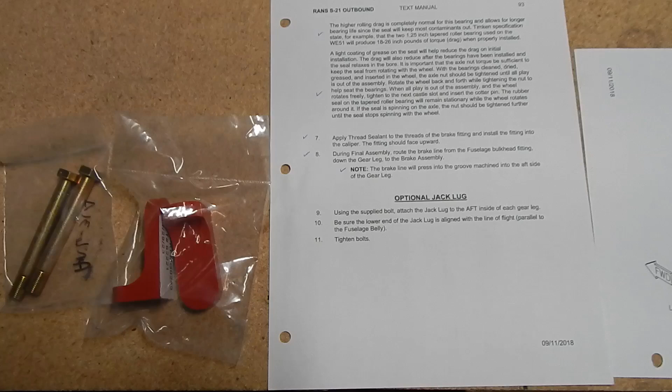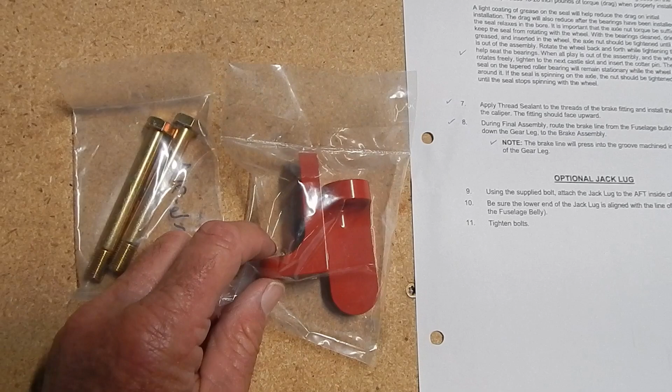I'm going to take a break from the motor for a little bit. I purchased the optional jack lug set, and these are just some lugs that go onto the axle or below the axle of the wheel. If you need to jack your plane up, it gives you a firm place to place the jack.

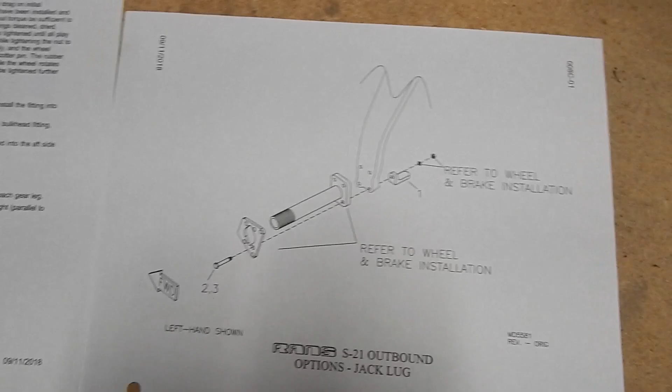You can kind of see the design here, that it just goes behind the gear leg and gives you a place for a jack. I've often thought about if I have to change a tire in the rough or outdoors, how am I going to do it? There really was nothing, no place to put a jack before. Even now, as I'm putting this on, I'm figuring, how do I jack up a side of my plane?

So I came up with a process here. I'm going to get the plane jacked up using this contraption, and then I'll get my lug on down here. Well, the jack lugs are on.

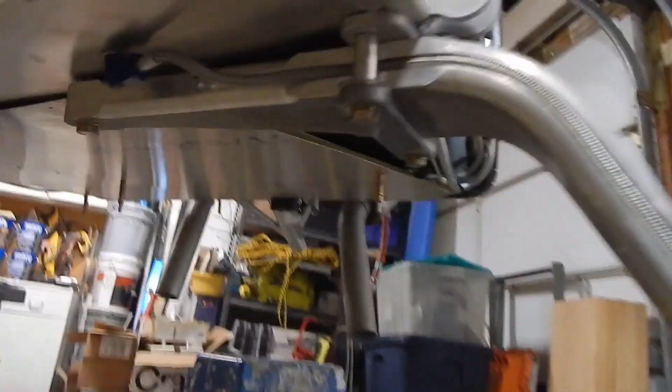They're a great addition, and if you are a new builder or haven't gotten to this point, I would definitely order them. Trying to jack the plane up without those is really hard. There's no place to put a jack under there. The only option really was underneath this, but you'll have a fairing over that later. And then you've got quite a distance to the ground to get your jack up, so you've got to have something, a wood brace or some type of step, to get your jack up that high. So I would recommend these if you haven't bought them already.

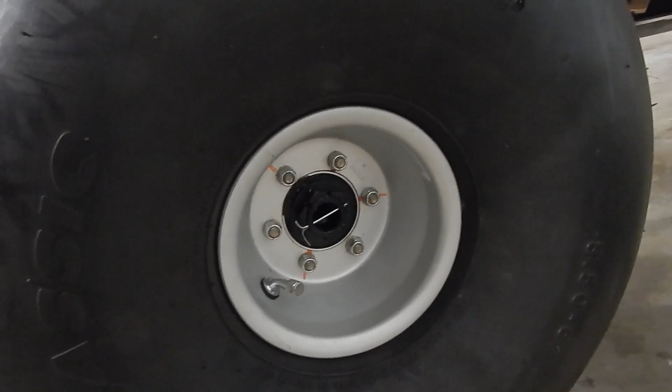It was a little bit more difficult than I had planned. I had forgotten when I put these wheels on that there's only 3 of the nuts that come off that bring the tire off. The other 3 actually hold your wheels together, the 2 halves of the wheel. So I've put a little orange mark there to remind myself that you only need to take those 3 off and the wheel comes off. The other 3, if you loosen them up, you've got to get a wrench behind them or an Allen wrench to tighten them back up. You don't want your rims to split because those are holding your seam together and everything else. If you split that rim, you're all over resetting your tire again.

It also involved splitting the brake calipers in order to get the wheel off and everything. It was just more than I had bargained for. I thought it was just going to be replace a bolt. But they're on, and I'm glad they're on, and we'll move on.

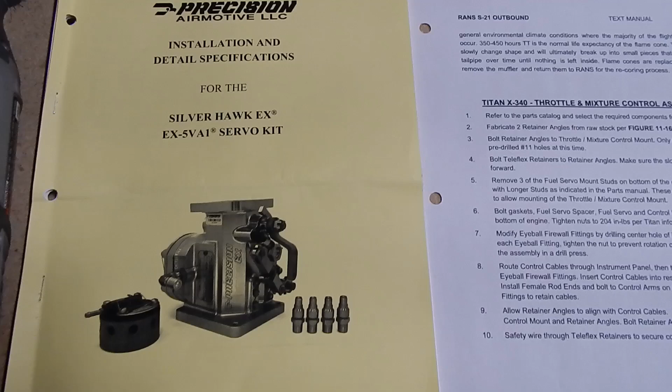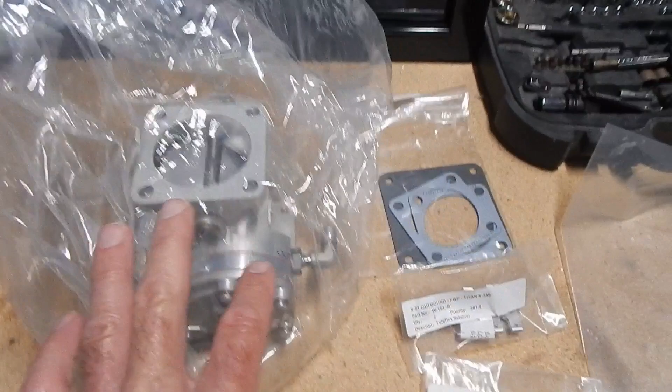Okay, I'm going to skip around a little bit while I'm waiting for some parts. I'm going to tackle installing the fuel servo. This came, I'm pretty sure it came with the motor. Yeah, it was part of the parts that came with the motor, the fuel servo. There's some bolts that have to get changed out apparently. This is a bracket, I think, for the mixture and throttle control. Some miscellaneous gaskets.

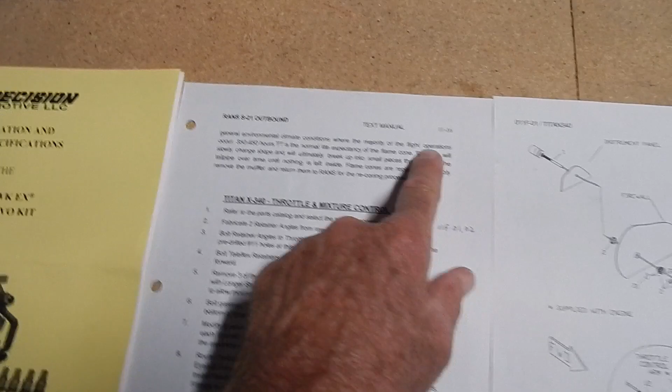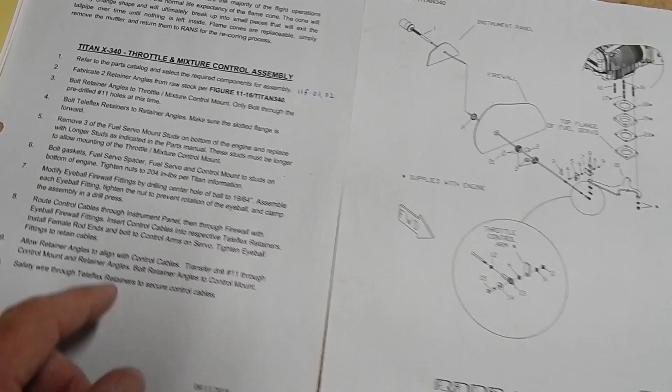Text page 11-16, parts pages 11-F01 and 02, and then a diagrams page where we're going to fabricate some brackets. So we will start with fabricating the brackets. That's where we start in the text.

The bracket material comes in a small bag. It's a pretty thick piece of angle bracket. Looks like you're going to make 2 of them, and they're going to be 1 1/4 inches in length. And then there's some specific requirements as far as where you drill these holes.

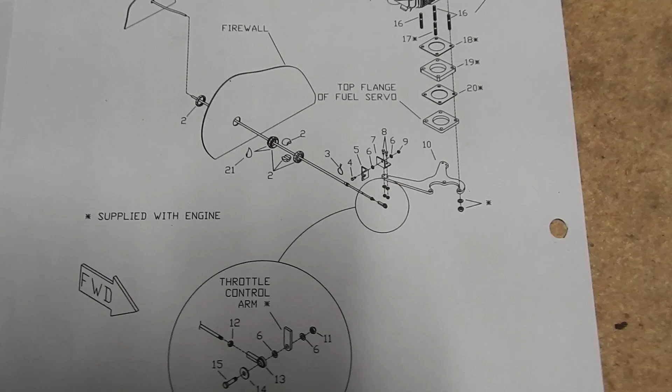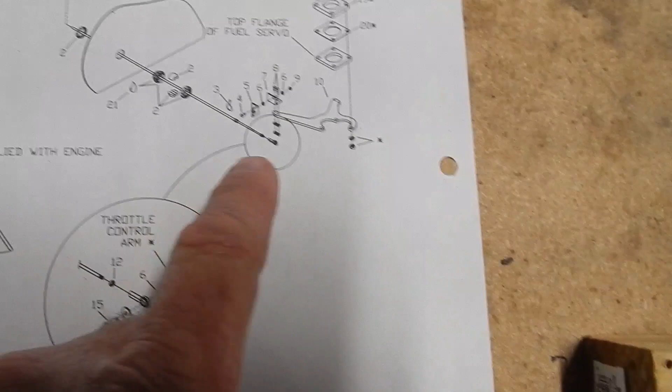Okay, it looks like there's 1 angle that's going to go down here, and there's 2 bolts that go through, but you're only drilling 1 hole. As you get further down, you're going to transfer drill the second one later. It does say to fabricate 2, but this is only showing 1, so I'm assuming the other one is going to come into play later. So I'm just going to put that aside and hope I'm understanding this.

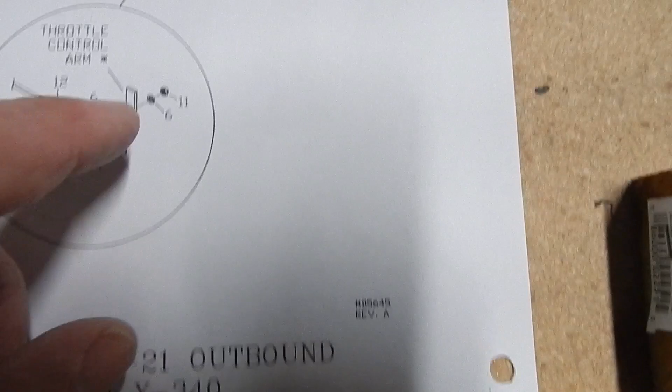So I've marked the hole 0.375 inches in and 1/4 inch down. So I think that's the mark. And then we're going to attach it to the control mount.

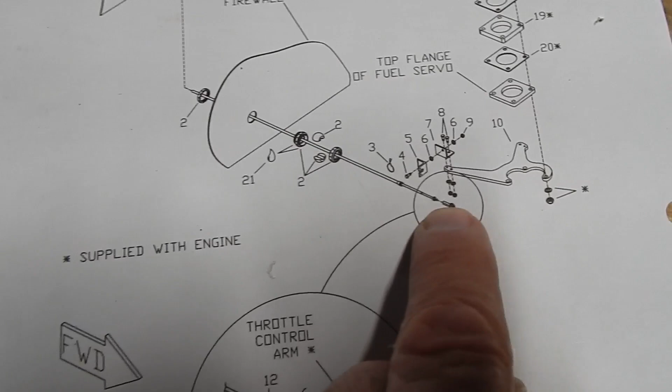It says to attach this with only one, the pre-drilled number 11, not to drill up the second one as mentioned. They're not labeling these down here, so I'm assuming this is the 3/16 thin washer and this is the 3/16 shear nut, which is how you've attached almost all the AN bolts before. So I'll make that assumption, attach it, and then attach this part of the assembly.

The next step is to get this underneath and figure out the direction. It's kind of a Rubik's Cube trying to figure out which way. So this is forward, and this bar goes back closest to the firewall. I'm test fitting it right now, I haven't taken off this spacer or anything, just test fitting. So I believe it goes in like this - this is looking back at my firewall, and so it looks like this.

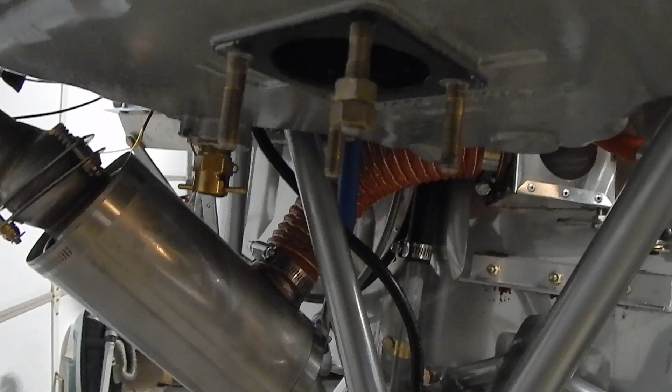It says to remove the 3 screws and replace them with longer ones. This one looks like the one that stays, and these on the right and the back look like they get replaced with the longer ones. The best way I've seen to take these out is to attach 2 of the nuts and tighten this top one down to the bottom one, and then all you have to do is spin this top one and the whole bolt will come out.

I'm going to show what I did to get these bolts out of here. So much for the easy peasy, just put 2 nuts together - these guys were in here so tight, I tried a pipe wrench, I tried vice grips, this double nut thing, my nuts kept sliding. So what I ended up doing is after tightening these 2 nuts together, I took a socket wrench and held the bottom nut, giving it a little less pressure than my upper nut, and really forced the two. Finally it started to turn, and I've now got it out. But it took a lot of finagling with these 2 wrenches to get the pressure right and get it out. But it came out.

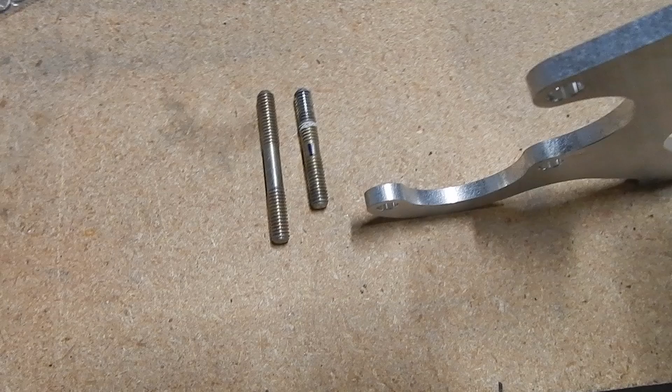In replacing these fuel servo engine bolts, thanks to Derek Kenny who pointed out that the 2 ends are not identical. The thread length at the top is a little longer, and there's a little cone shape on both the one that came out and the new one, more so than on the bottom. So it looks like they go in a specific way. I'm not sure the purpose of this little cone, but I'm going to put it back the same way the old one came out. Also, as far as how far to screw them in, I've seen some dialogue on that - this is the width of that control bracket, or the mixture throttle control mount that's going to go on, which requires the extended bolt. So I'm assuming that's the extra distance we need.

So when I install them, I'm going to sink them down. It's not going to be the exact same spot, but I'm going to sink it down to where I have just about that much, if not a hair more, maybe a thread turn more than that distance, because that should be exactly what you need.

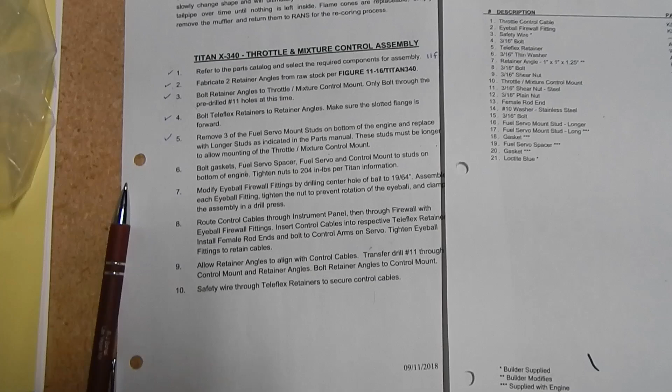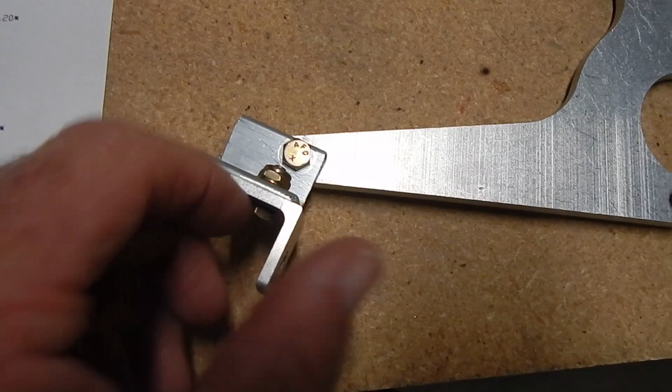Now that we've got those engine bolts in, we're going to attach the spacers, the gaskets, and the fuel servo. This gets attached, but you leave these bolts loose, because you're going to line this up with the throttle cable and the mixture cable when it comes in before you tighten them down. And you're not going to match drill this again until you set it. So it looks like we attach it all to the bottom of the motor, and then we'll final fit this.

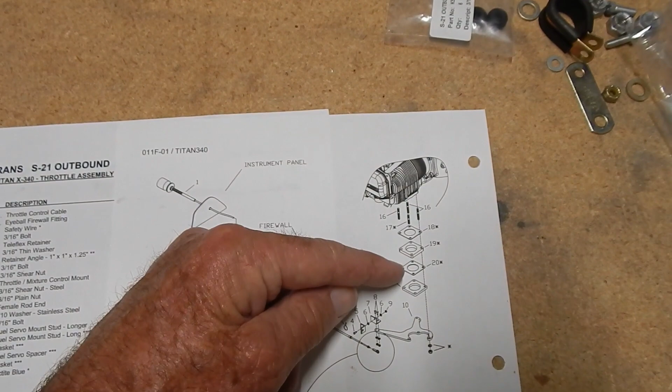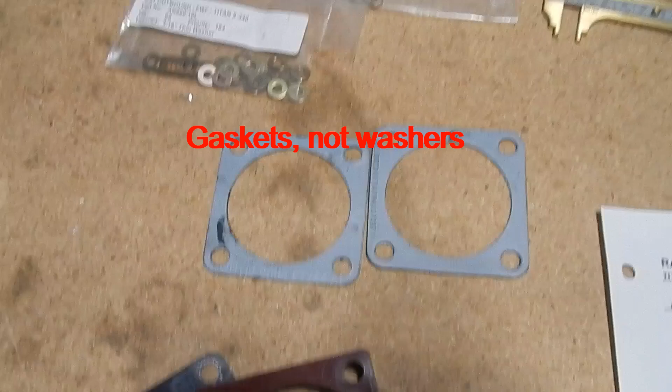Another head scratcher, and I'm going to tell you what I'm going to do. In attaching the fuel servo, it shows gasket, spacer, gasket, top of fuel servo, and then your mount arm. What came with the engine was this gasket against the engine, then this spacer, then this gasket with these washers in the corner. But if I try and install the servo with these washers, it leaves a gap. I don't know why there's washers here. And then these two gaskets were in the supply, and they look an awful lot like fuel servo gaskets.

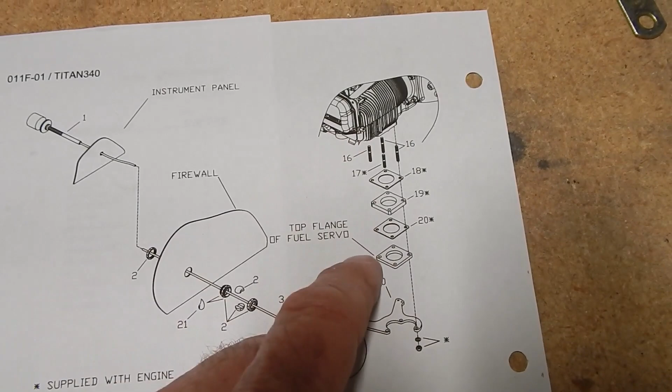So this spacer came with a motor. I think what I'm going to do is go gasket, spacer, gasket. I'm going to use these two gaskets and this spacer, and not use the ones that were on the motor when I got it. It doesn't say anything about existing gaskets, so it clearly just says gasket, spacer, gasket goes up on the motor. That's what I'm going to do, unless I hear otherwise from the forum.

So that bolted on pretty easily. And I've got a bracket here. These are still adjustable because they're not tight, so as the cables come through, I'll be able to adjust it. And then we still have to match drill that after the cables come through. But this is attached using the spacer and the two gaskets.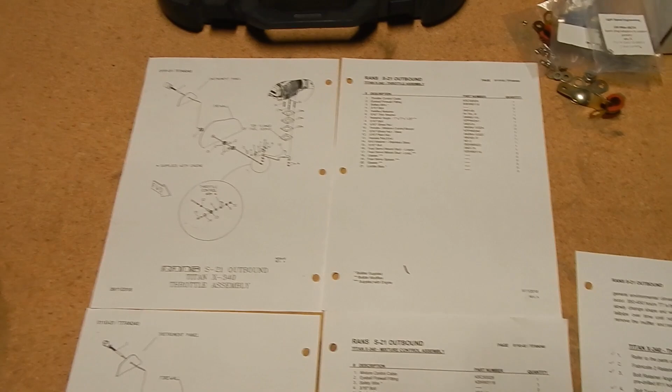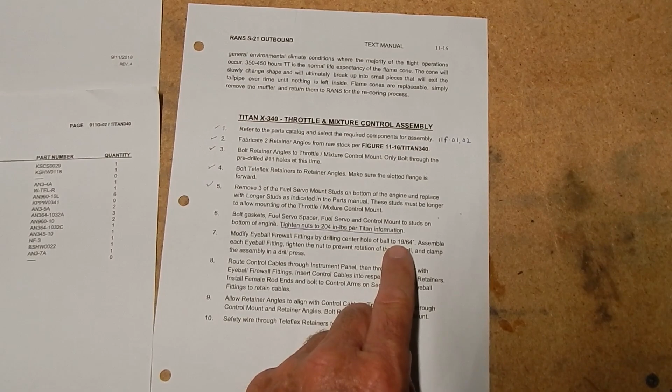My next step is to work on the throttle and mixture cables. They tell you to modify the eyeball firewall fittings by drilling the center hole to 19/64. So I guess the current hole is too small. These are the eyeball fittings that are back up in there, kind of back in here. So we're going to have to get those out, modify them, and get these cables run.

And I believe they're going to run through the back of these brackets up here. These are the ones we made with the angles, one for the throttle and one for the mixture. And then I assume they go on to the appropriate brackets.

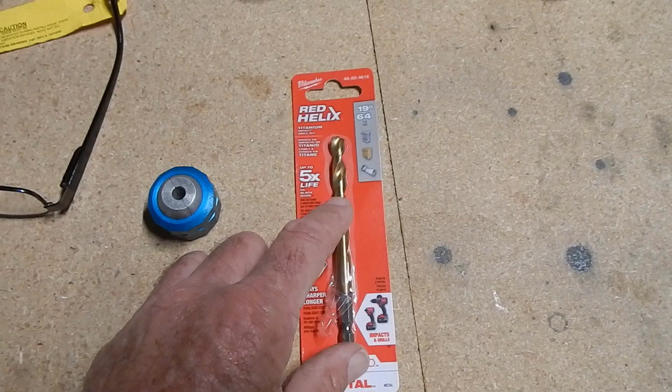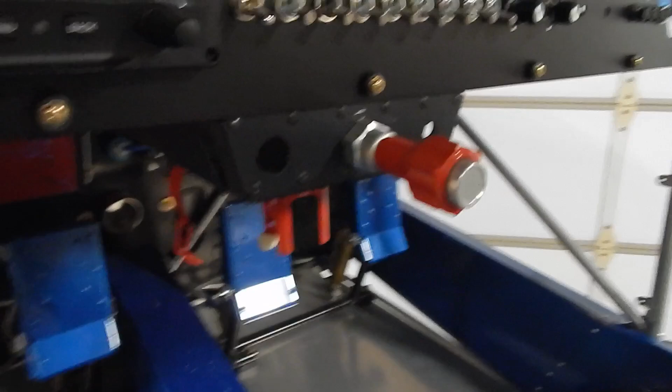I started with the mixture cable. I set it through my sub panel, and as I got about here, I slid on the nuts and washer necessary to tighten up in there, as well as the nut for the eyeball down here. Then slid the cable all the way through.

And I did use the bottom hole for the mixture, which seems to work coming under this fuel pump. I just ran it down here. It's still loose at this point.

And I put the ends on and just temporarily set this up loosely, then played with the length of the cable. You can kind of push the cable back into the sub panel and get the distance straight.

Now that I've got this set where I want it, this is going to slide in here. Remember, we haven't finished match drilling this, so I've got to match drill it out to the other 3/16 and tighten everything down. Then this gets wire tied in. I would imagine I've got to widen this so this goes inside, is what I'm thinking, but I'll check. And then we'll just reattach this up to the mixture control arm.

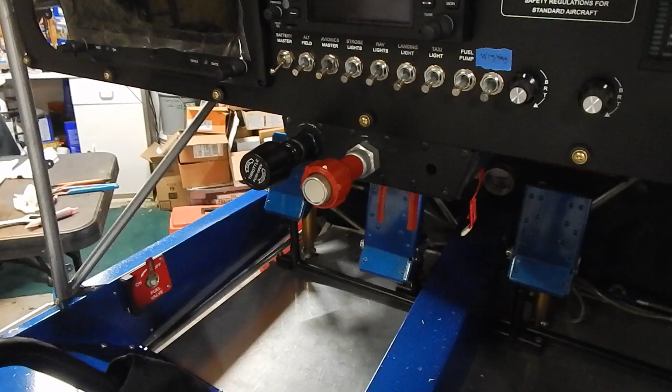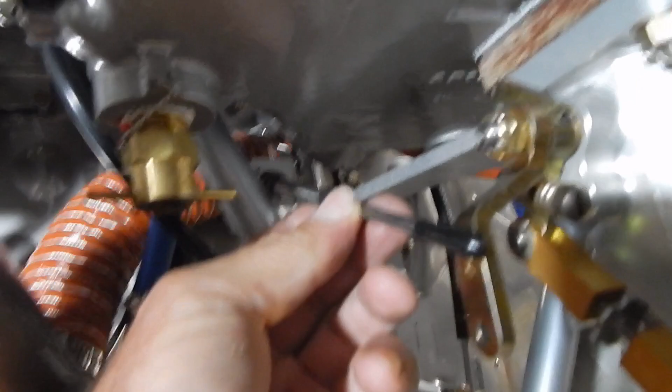I've installed the throttle cable now, using the same process through the firewall and those eye nuts. Two comments, and I think others have said it too - this throttle cable is a little too long. In order to get it into the proper location, you have to create some kind of a swirly motion, which puts a little tension on it.

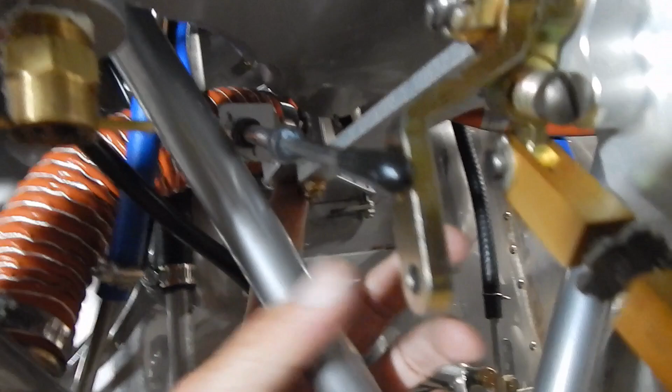And then when you go to fasten your brackets down, the angle this is best suited to doesn't give you enough metal over here on this angle bracket, so you've got to offset it just a little bit. I think I saw Tony from S21 Project - he actually created a new bracket where instead of drilling the hole near the end, he drilled it more towards the middle, so that when you rotate it, you had enough aluminum over here to grab.

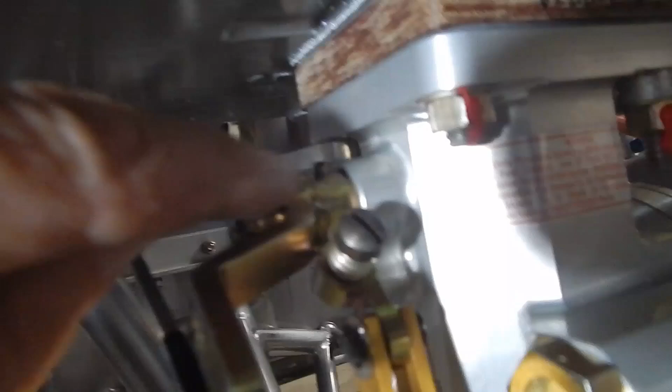And then the next thing is, this is in the forward, all the way forward position. Here's your throttle all the way forward, your throttle all the way back. So in order to set this, this crank handle gets adjusted - see, you can see some teeth in here where it's grated. You just take this cotter pin out, loosen this nut, change the position on it, clamp it back into the teeth here, and put the nut and cotter pin back on. So there's a little bit of adjustment necessary for this cable length, but not that difficult.

I've set it in there with enough to grab, and in my opinion the angle's okay - perfect, maybe a little bit more, but the angle's okay.

Well, that's a good place to stop. Kind of a short section for this episode. But next time we will work on the airbox and also get some of the engine sensors hooked up and wired, and we'll look forward to that. With that, thanks very much for watching, and just remember, dream it and just build it.